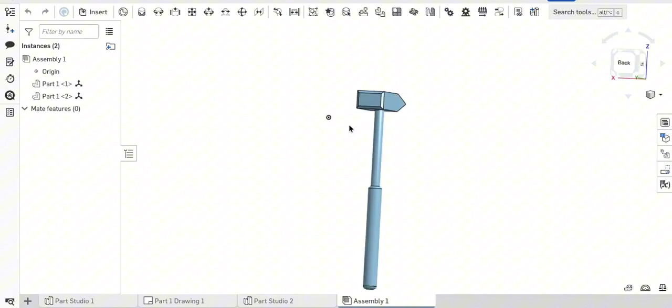Okay, so here I'm going to show you a project that I've made in shop. It's a hammer, basically, and I'll kind of be showing you the assembly to it. It's not your typical hammer, not your ball peen hammer, not your curved claw. It's a little bit different than that. But I'm just going to show you what we designed in the shop. It might be a little bit slow, my computer's kind of old, but it seems to be working pretty okay.

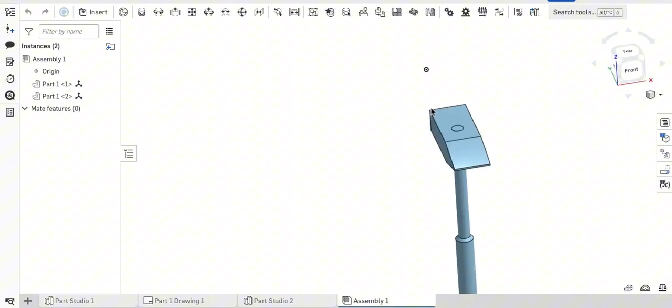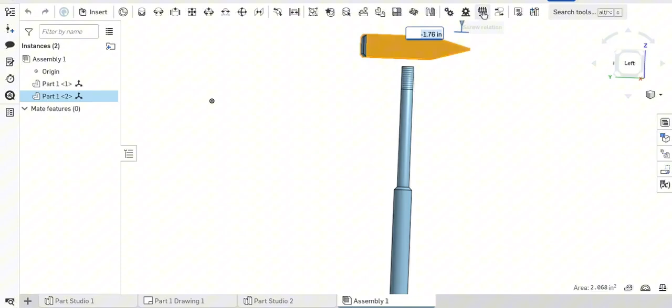But this is the hammer I've designed. The sensitivity is very different, but when you click on the hammerhead or the handle, you can move it around pretty much, and you can see what you want to see if you move it around. This is the assembly—you can only do this in assembly. There's drawing, and then there's part studio. Part studio is the actual part. So let's just show you very quickly.

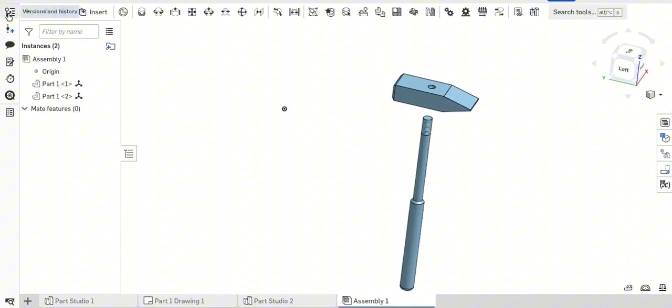But yeah, so let's get out of that and let's go over to the create button, and we're going to create a new document, and we're just going to call it demonstration. I'm just going to demonstrate how to make a simple part. Doesn't really have much use at all, it's just to show you how things work.

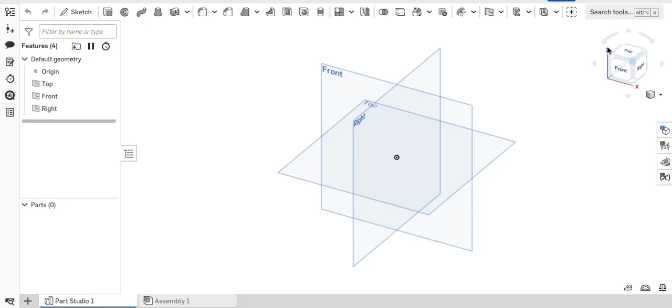So what this is here on our right is called orthographic projection, which is your six view planes: front, top, back, bottom, left, and right. And pretty much what you do there is you click your sketch plane, you select which one. I want to do front, so I'm going to left click front. Then we're going to click sketch, and now I'm in.

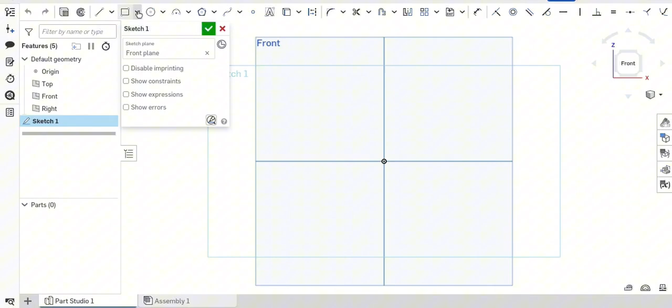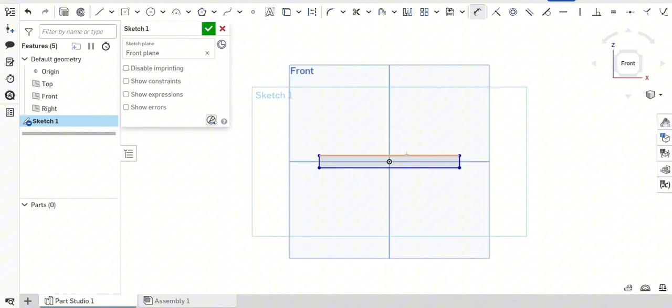So what I'm going to start off doing is going up here to my rectangle area, and I'm going to click center point rectangle. Then I'm going to go to my origin, and I'm just going to make it any size, because I can show you it can change no matter what size you place it down as. Now I'm going to go here to dimension—this is your dimension tool where you can change the size of anything. You can just click D for a shortcut, but here I'm going to click the top line, drag it up a little bit, and I think I'm going to put it at 5.

You can type it, or you can use your scroll wheel. Typing's a lot easier, but here we're going to go to the side and change the height.

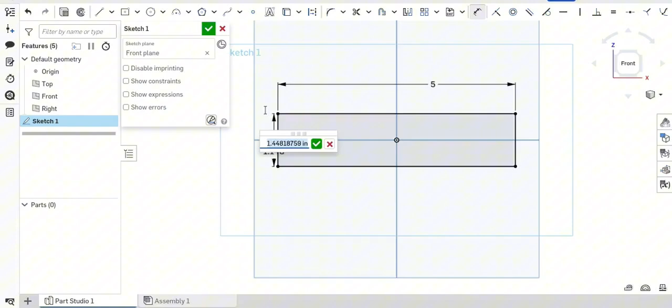After I click the side, I'm going to go over here—I'll just demonstrate how you can use your scroll wheel real quick. It's a lot easier when you type it in, so I'm going to place this dimension as 5. Now I have a pretty big square here.

It's 2D, but I'm going to show you how to make it 3D and add material.

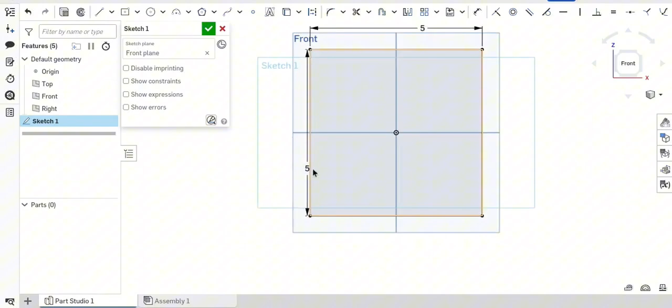I'm just going to level out my plane real quick, my view. And if you go to your dimensions, you can kind of move them a little bit if you click off of it.

Here I'm going to go to the top left area near the undo and redo buttons and click extrude. Basically what extrude does is add and removes material. Here I'm going to add about 3 inches.

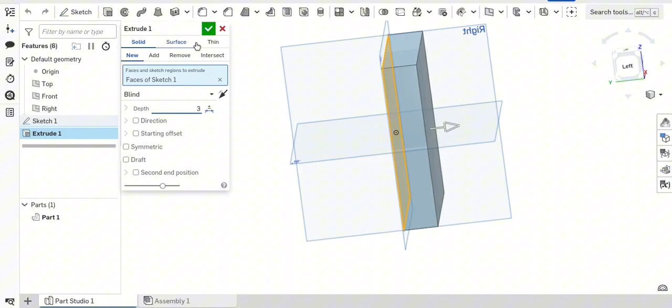Now I have a square. I'm going to show you how you can remove material from this while keeping the actual square intact.

So what we're going to do is go to the front plane. We're still going to be there. We're going to click the face of the square and go to sketch.

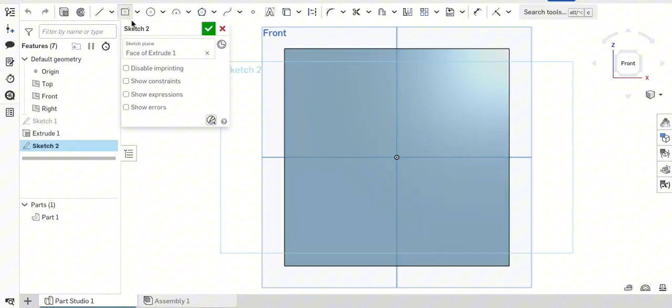Then we're going to go back to our rectangles drop-down menu, back to center point, and just drop it here. I think I'm going to set both dimensions—3.5 sounds good. We're going to set them as 3.5.

They're already pretty close, so it's not going to look too much different. Let's just select that for this side too. And boom, now we have our square drawn on this face.

It really has nothing to do with the original square. It is a new sketch.

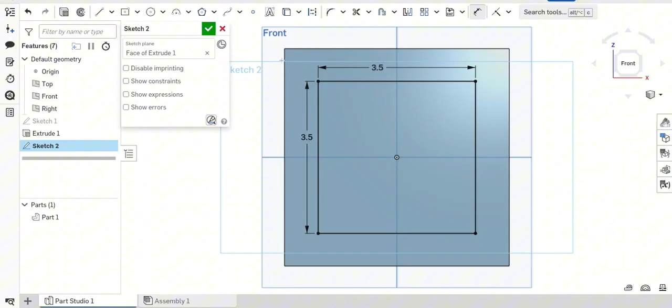So pretty much now what we're going to do is go over to our extrude tool once more, and we're going to select remove this time.

There's two ways you can do this: you can use the arrow, or you could just type in the amount of material you added, which was 3. But I like to just follow through with the arrow.

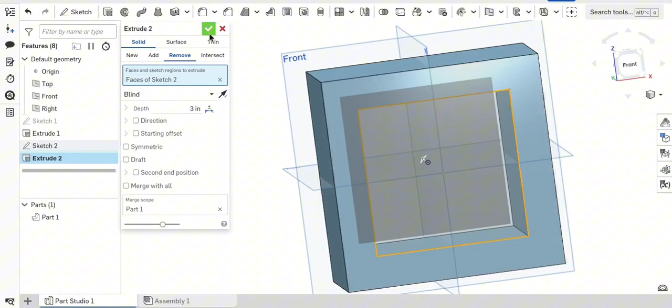It makes it a lot simpler, but I'm just going to type in 3 here to show you that it works both ways. Type 3, click check mark, and boom—now you have your square carved out in the middle.

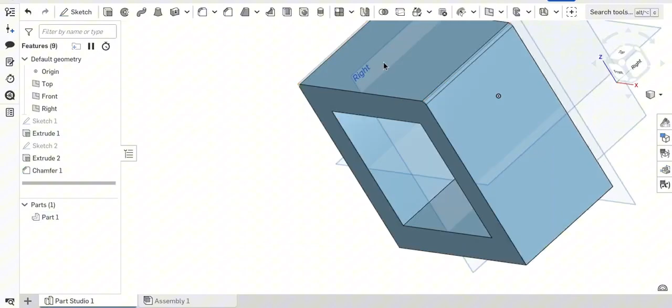I'm going to show you how to add a quick little detail you can use on different things. If you go up to the top a little bit, you find a tool called chamfer, and essentially you just click the sides. It adds good depth and detail to whatever you're designing. Just a cool feature I wanted to add and show you guys.

But thank you guys for watching. Again, this is CAD software called Onshape. It's a cloud-based website, so you can pretty much use it anywhere. Thank you guys for watching.